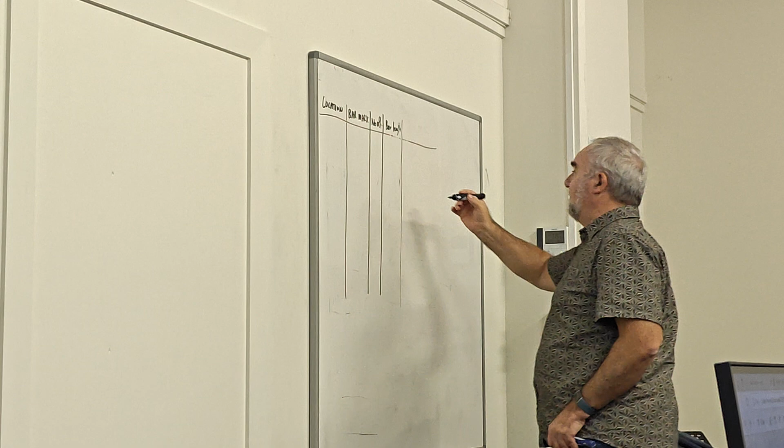Going to get it wrong. Bar length, hopefully you'll prove me wrong. Bar length. And then after that we have the mass per metre and the weight overall. So mass per metre, the weight. And over on the far side here we're going to do a sketch.

So let's have a look at what we've got, and I'll just summarise it. So it's kind of a T-shaped retaining wall. The ground is over here. So when the ground is over here, this is the bit that's open to the air. So when we talk about each face and far face, we're looking from this side. We're looking from the side that's not being retained. So therefore that would be near face and that would be far face. But because we've got them on both, we call it each face.

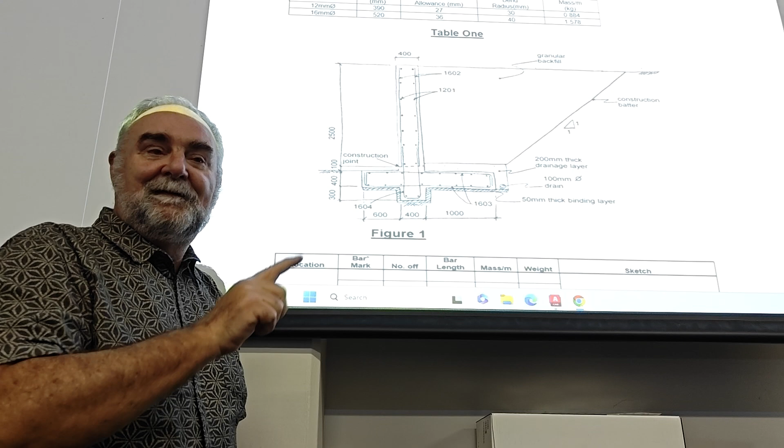Now there's abbreviations for those and they're not too hard to remember. Near face is NF, far face is FF, and each face is EF. Yes, that's not worth half a mark by the way, but it was very, very quick of you. So you're going to have to put that abbreviation into there, and I'll do that in a second.

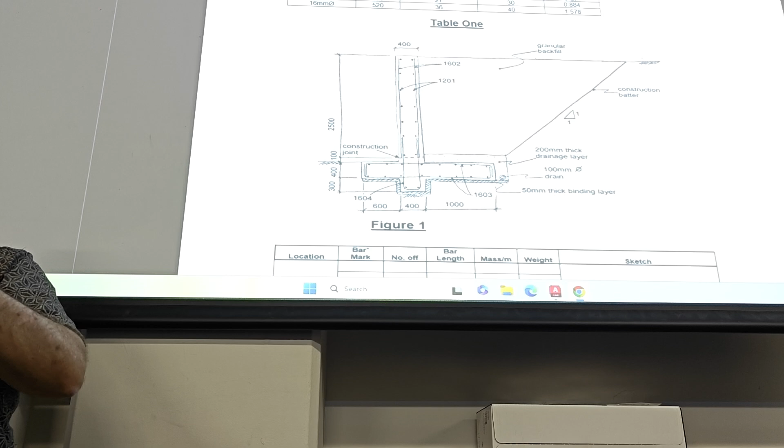The next thing to look at is that when I do a sketch, it is only a sketch. All right, do not copy it. Think about it. With reinforcing, it's exactly the same with bolts, and it's exactly the same when your grandmother used to do the quilting of the thing that's on top of your bed. Where did she stitch it? Did she stitch it in the middle or right around the very edge?

Come on, own up. Who's done quilting before? No? There's no real men in here, is there? No. No All Black potentials?

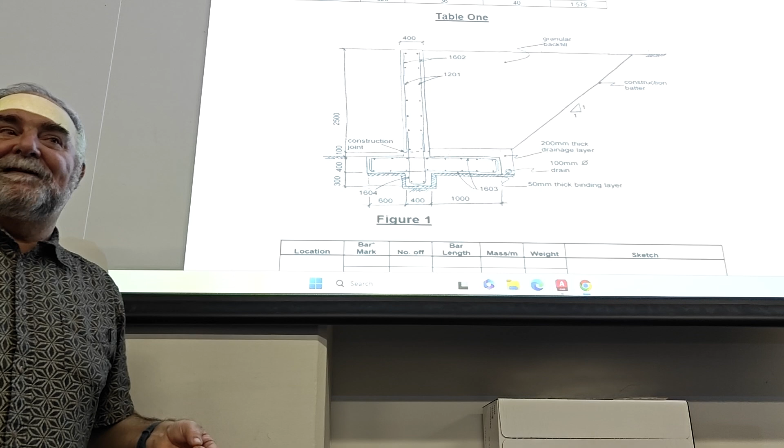No? Okay. So quilting is a thing where you make kind of like a duvet, and to make it the proper strength, you do the stitches around the outside. With reinforcing, we push the bars right hard against the cover. Now this morning we talked about the cover and the reason for it. For example, yeah. Beg your pardon? To avoid them from the rust. Yeah. So we've got to push the reinforcing to the edge, not over the cover. So it's against the cover.

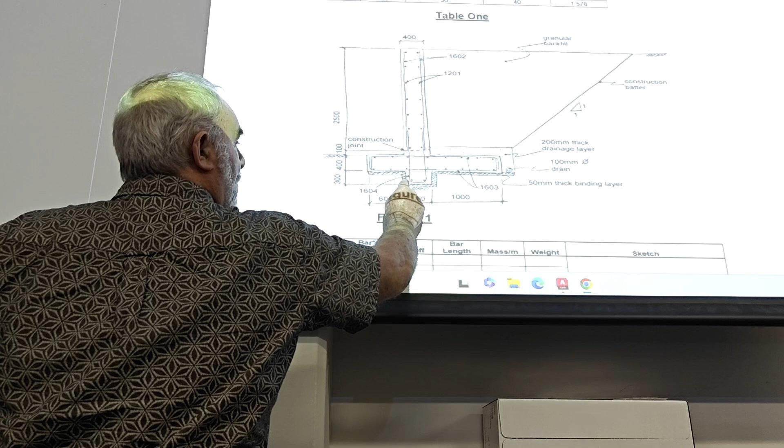If my hand was the cover, it would be right there. Okay. And that's how we work out how. So for example, this piece here, the sketch shows me it's inside here. So this is all 400 all the way up, but there's no reason why that bar can't go in behind the other bar, which means if we push it against the cover up the top there, 50 mils. So that will be 400 minus 50 minus 50, and that's what it would sit hard against. So we already know the width of that bar is 300.

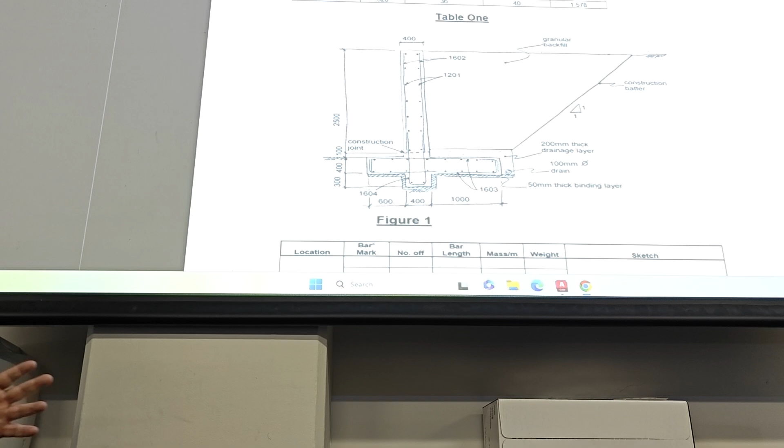The only time when you can't push it against the cover is if there's another bar in that direction stopping it from going any closer to the cover. So there are times you have to think about it. Same with these. Even although I show that in a sketch as being overlapping, in actual fact both bars are in behind each other. They're exactly the same. One's upside down and the cover is 50 mil, so that would be 2000 minus 50 minus 50, and that would give me the overall length of that bar. So it is fairly basic, the maths, it's not too bad. But you're starting to get the hang of what I'm talking about in terms of pushing it to the outer extreme.

This one is an old exam question when you had to sit an exam in this subject back in 2010. So it's got a few other things here, like they call that blinding concrete, which is kind of like a builder's mix that gets thrown down there before you start the job. It's got some drainage, which you have all got, or filter material, and a drain, and granular backfill, not blackfill.

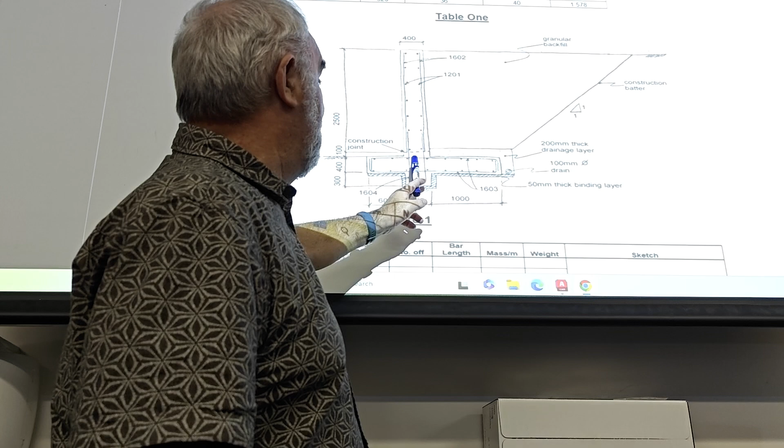See the wee donuts? No, you've got to work it out, and you'll actually find that that's not right, because this is a sketch, I've only sketched it.

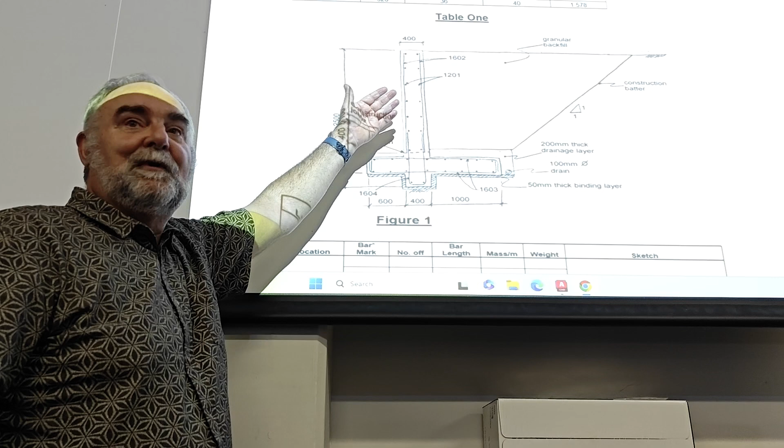We need to work it out as engineers properly. This is very typical of what I used to get, that I'm not a registered engineer. A registered engineer would come into the office, sort that out - that's his design or her design, and you would have to turn it into working drawings and do the bar schedule.

So it's not unheard of, that sort of thing. How do you figure out the faces? This here is all...

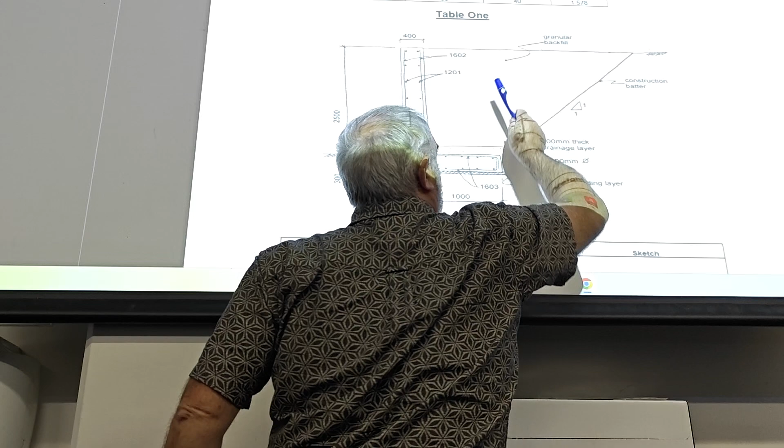Granular backfill, which is kind of like a very fine material made of rock. So this wall is holding that back. So you've got a property and you've put a retaining wall in and you're stopping anything coming any further.

So you're looking at the face that's got the earth. You don't have a retaining wall with dirt on both sides - always one side's being retained. So if this was a retaining wall and I'm looking at it, then this would be near face and and the other one would be far face. Okay, right?

You don't have to worry about that on our assignment because we're looking down on a slab. But you will in the test, so do remember it for the test.

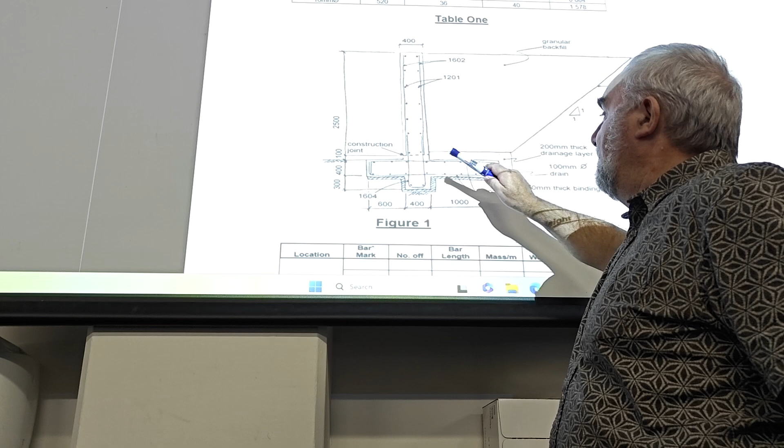Okay, so the first bar we're going to look at is 1201. 1201 is the donuts, they're all over the place, all the way down here, all the way down here. So when you get a complicated drawing slab like this, we divide it up. And there is a reason for dividing it up because we've also got something different called a construction joint.

Now, there is - you would have heard perhaps before of an expansion joint. And the chap at the back in the lecture this morning mentioned about concrete expanding and contracting. We often have expansion joints just for that reason.

I'll give you an example, a bridge. You know, when you come up to a bridge on the road and your car goes thump, and you go off the other end thump, and you carry on. That's an expansion joint, and they fill that up with a bituminous type mix that takes up the expansion.

All right, so you'll get that thump thump as you go off a bridge, and that's why often in major earthquakes all around the world that go up and down, often you'll see a bridge has dropped and the road level's up here and the bridge is down here, because the concrete was always separated from the other concrete leading on to the bridge.

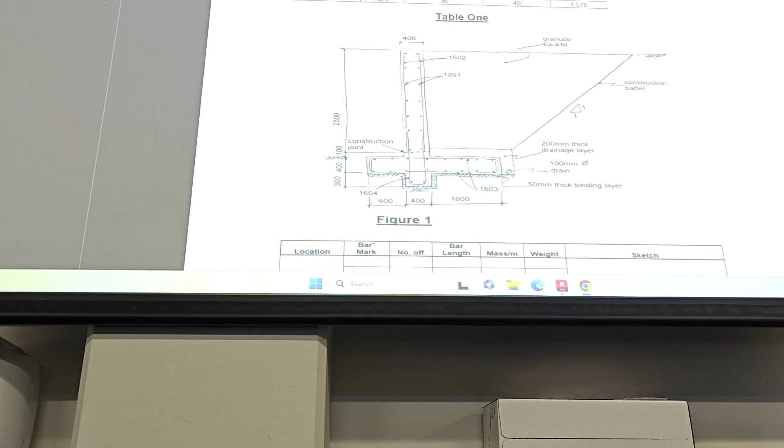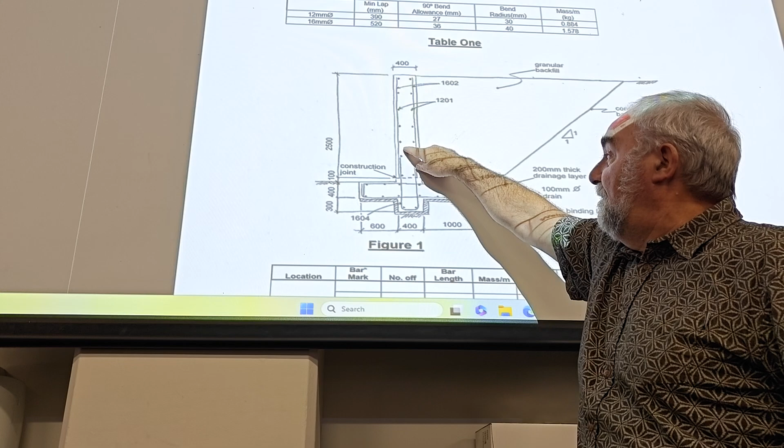That's not an expansion joint, that's a construction joint. That means that they will pour this concrete here and they'll leave this reinforcing sticking up, and then when it's settled, the concrete's set, they'll come back, they'll put the shutters up there and they'll pour the next bit of concrete, and before they do that, they'll join the reinforcing with the lap and tie that together and away they go for the next lot.

You might have noticed on building sites sometimes you see these sticking up. Well, they used to just leave it like that, but now they put little cups on the top.

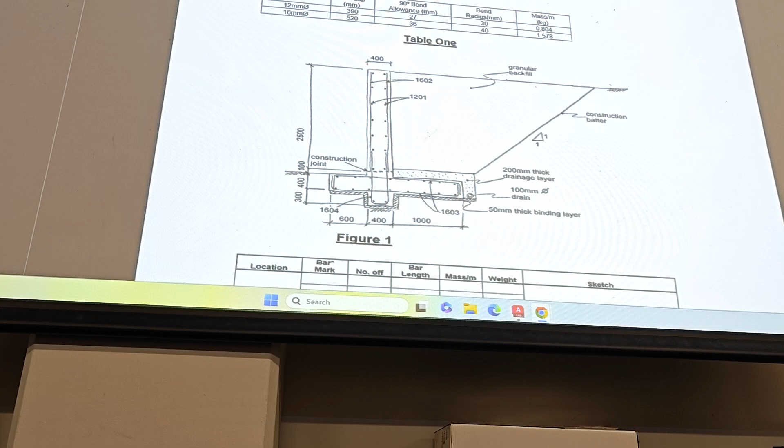And the reason for that is exactly the guy that I was talking about this morning that's built about this wide. He used to tell us stories of men falling off buildings and landing on those and ending up like a skewer when you're eating chicken, and the cups apparently stop that from happening. I don't know if they do, but you can easily fall on them anyway, just trip on them.

So it's the last thing you want, so they protect those with little cups. So you've learnt something today about health and safety - how about that?

So we're going to calculate all of those bar lengths, all of their dimensions, and all of their weights. So let's start with 1201.

So we're going to have this bit, and the bottom bit. So in a nutshell, we're pretty much going to do this 1201 here. We're pretty much going to calculate this bit, we'll call that A. This bit, we'll call that B. And this bit down the bottom, we'll call that C.

So let's start looking at A. To work out how many bars there are in A of those donuts, we have a distance of 2,500 from here to here.

We can't lie the bar on the construction joint because it's running that way and the whole bar won't get concrete around it. So we have to lift it up, the cover. We have to lift the cover up down at the top. So we end up getting...

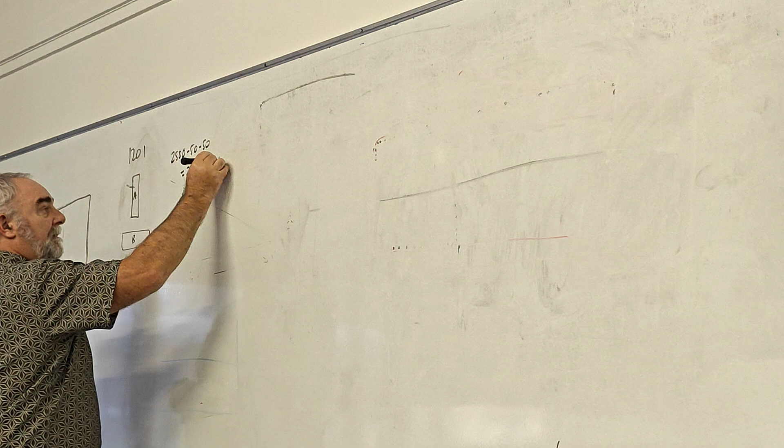And what do we get for an answer there? Sorry, that's not worth 8 marks, I mean half a mark. 8, someone a bit cleverer than me at maths. How about that? Okay, so that's 8 bars, right? You happy with that, Mr. Mathematician? 8 bars, right? Yeah. Wrong. Just 2,400 divided there? It's 8 gaps.

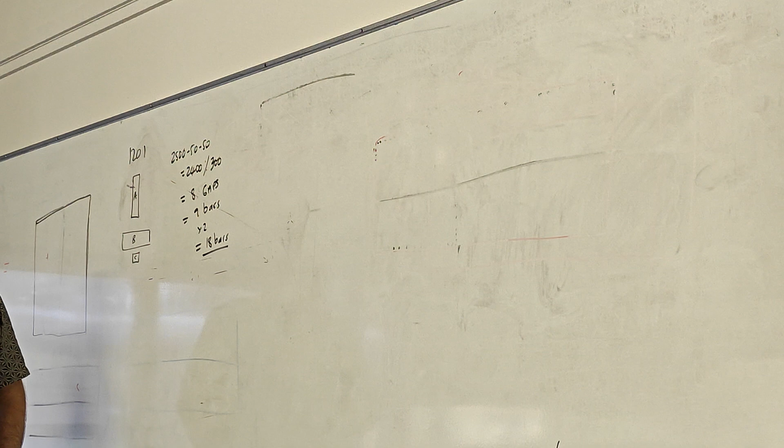No, I said everyone would get it wrong. Which means how many bars? 9 bars, right? Wrong. There's bars on the other side too. 9 times 2 equals 18, right? How about that? You all happy now? You should be, because that's right, okay? So let's put 18 bars there. 18 bars. So take A away, and we'll call that 18.

Let's go to B. So when we do B, it's a bit different. When you go vertically, it's easy - you take away cover, take away cover. When you do B, it's complicated, and this is where it's going to get complicated in your assignment. I'll do a big blow up of this. So the bars go like this, and they go like this. Alright? And the donut starts there.

But what's that distance? Well, the distance is going to be equal to 2 times the diameter, 1 times the diameter, and the cover, CVR. And it'll be exactly the same at the other end to find the centre line of those bars. So we do it centre to centre, horizontally.

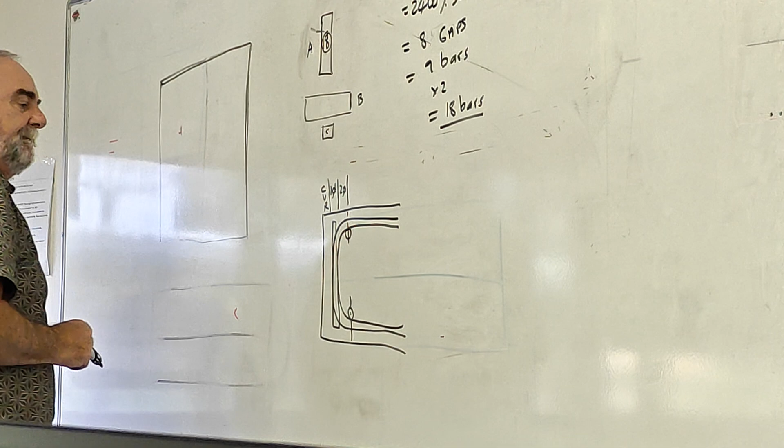So let's put that into maths. What's 2 times the diameter? Hold on, is it diameter of that bar or that bar? It's actually the one that wraps around it, right? So that's 16 mil, so that'll be 32. 1 times 16 is 16 and the cover is 50. So that distance is going to be equal to... that will be 32.

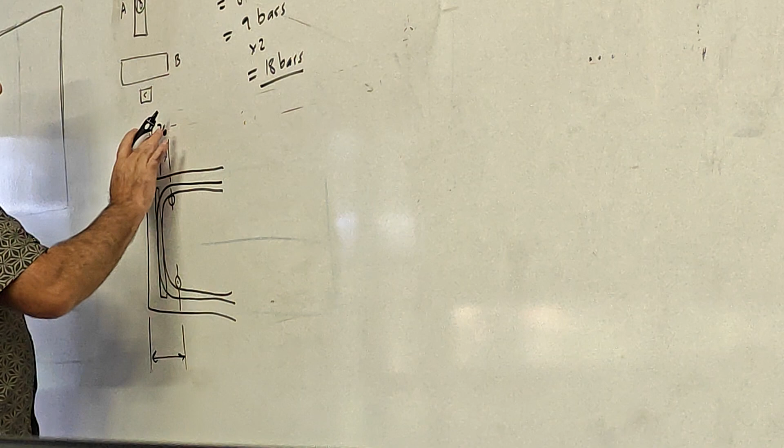Oh, well done. No, not half mark. I get that at 90 something. What's that, 90... 98 or 88? 88. 50 plus... big pardon? 98, yeah. And the other end is also 98.

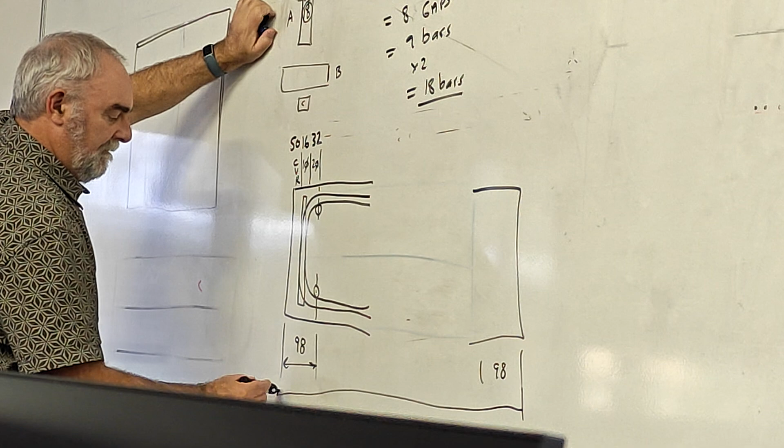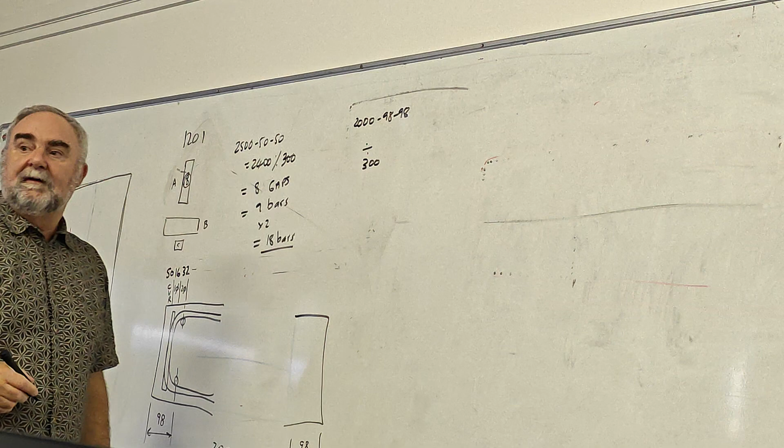And the overall length from here to here is 2 meters. See up there? So it's going to be, the equation for that is going to be 2 meters minus 98 minus 98, and then it needs to be divided by 300. So have we got someone that can do the maths on that? Here we are. We'll do that on... oh, you need your calculator this time, yeah? But you did the first one so quickly.

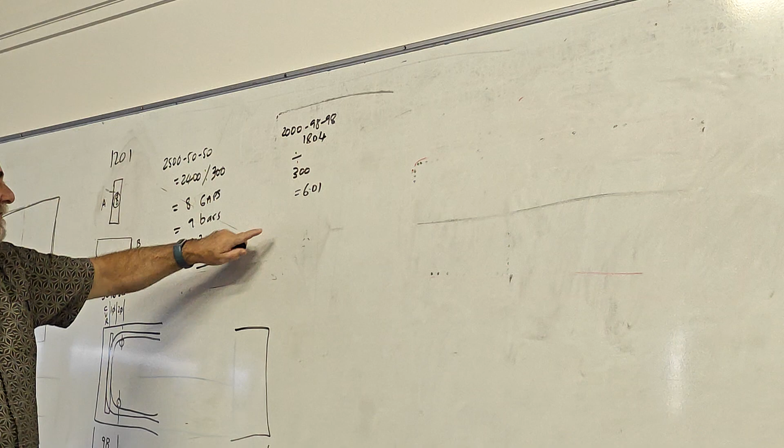And that means it's 7 bars times 2 equals 14. Right? Or is it right? I did say you were going to get it wrong.

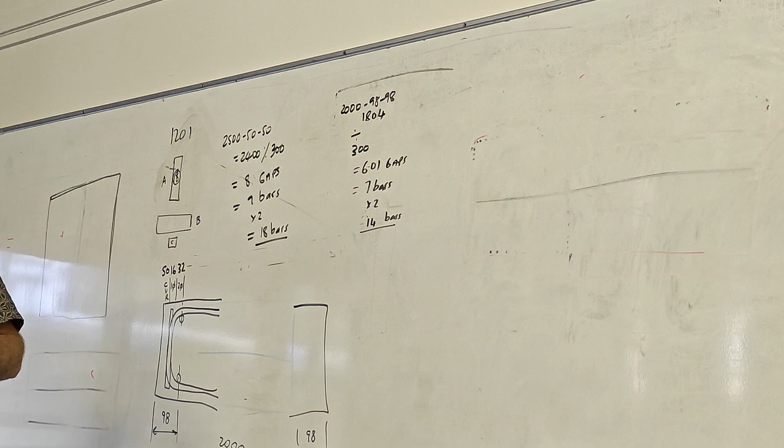Now remember, in New Zealand we over-design, like I said this morning in the lecture, because of Christchurch and every other thing that's happened with earthquakes. Does that go up to 7, or does it stay at 6? 7? You think 7? Go up to 7. Lots of 7s here, fishing for a half mark.

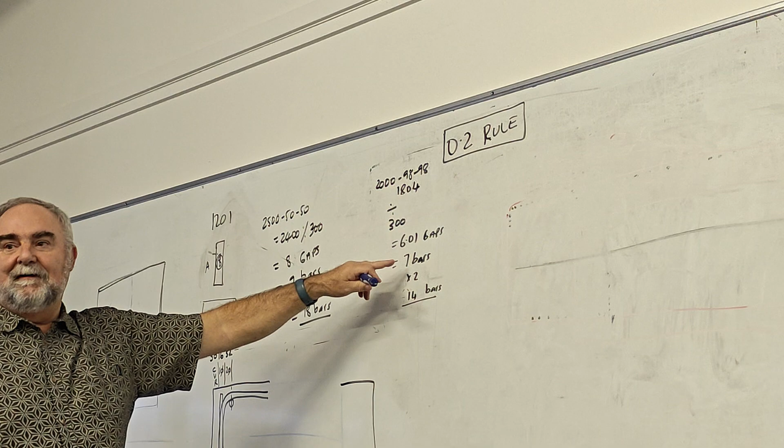Okay, I'll let you out of your misery. The rule is the 0.2 rule. Please don't forget that, because in the test I've got 0.199s and I've got 0.2s, and every student puts their hand up and goes, was it up or down for 0.2? The answer is 0.2, it goes up. So if that was 6.2, you guys would have all been right. If it was 6.1999, it would stay at 6. Right? Don't forget that. So in actual fact, that is correct. I'm just playing with you a bit.

All right, so that's 14. So this becomes 14. And you have a look at the bottom, because that is 300, and if you take away the cover, that makes 250, and it's 300 centres. You can only put 2 bars in there. So that's all it is, 2 bars.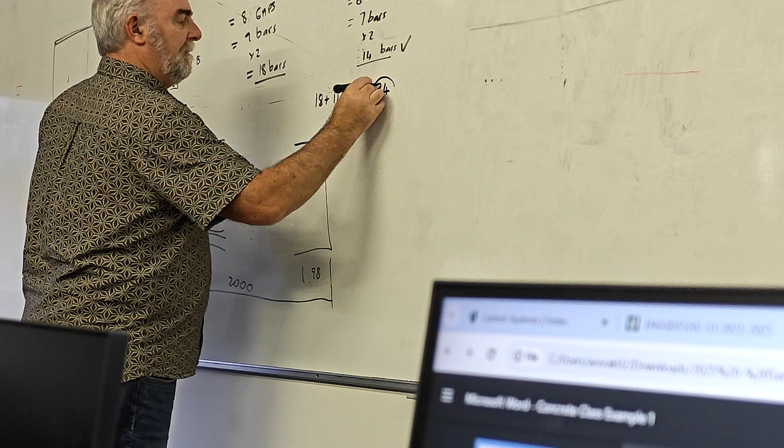So the number of bars is 18 plus 14 plus 2, which equals... 34, yeah. 34 bars. It's an alcoholic's dream, isn't it? 34.

Well, at this rate, we're still going to be here about midnight tonight. We've managed to fill in one number on the bar schedule. Yep.

Okay, there is a bar mark there that we can copy, so 1201. And I've already talked about the location being each face, but we've also got the top and the bottom, so that's easily covered. EF, E, F, and top and bottom. Alright? So you can have a combination of them all. You can also have each way, EW.

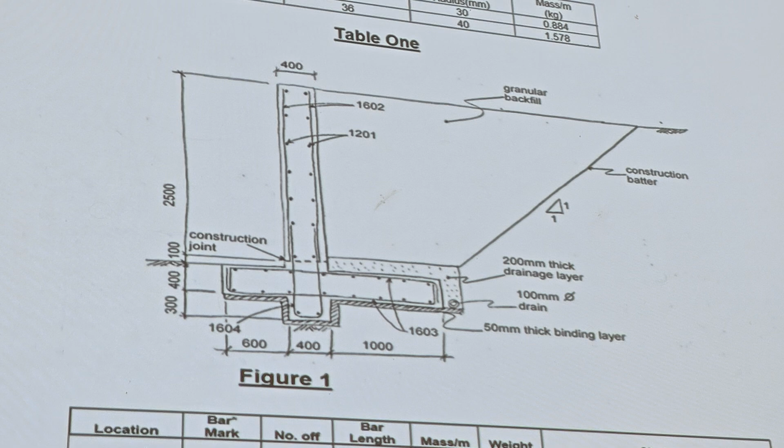But we haven't really got very far. We've managed to figure out one box. Anyone like to have a stab at how long that bar is? Going from here into the wall. I'll open it up to half a mark for a few seconds. You're allowed to answer it as well, but you won't get the mark. 5 meter. Very close. Unfortunately, it's 5 minus the cover at each end.

At 4.9. 4.9. Yeah. So I better actually write that up here so that anyone, you know, when you're copying the answer, yeah, length equals 5 meters minus 50 minus 50, which equals 4,900.

Now, here's another one for you. Another half. Gee, I'm throwing away all these marks. Bar length is 4.900. Why is it 4.900 and not 4,900?

Everything seems to be in millimeters. We're drawing in millimeters when it comes to your drawings. We're talking in millimeters. I've just been doing millimeter calculations. I get over here and I suddenly put 4.900. Half a mark.

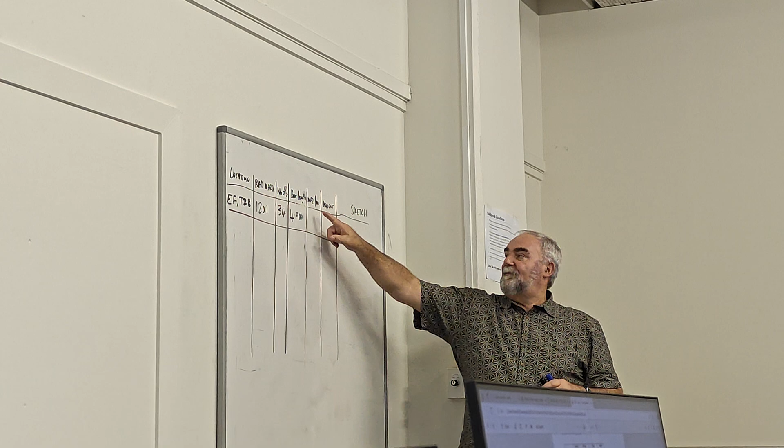This is a mechanics mark. By the way, and I would be very disappointed in you guys. Mass per meter, you can't work out the total weight in kilograms without putting things into meters. Doesn't work with millimeters, alright? A lot of my students don't do that, and they end up with 4,900. They multiply it by the mass, they get a weight of like 6 million, and they don't take the noughts off, and that's the kilograms that they come up with.

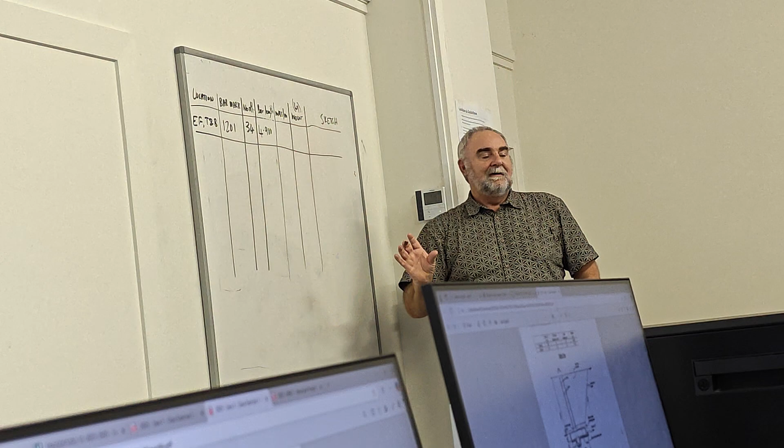So if you want to do it into kilograms, if you type right now into Google how much is steel, it'll tell you in kilograms the weight of steel. So we're talking about putting things into meters. So there is a mass per meter there that's on the chart up the top, and you'll see at this end for a 12 millimeter bar the mass is 0.884.

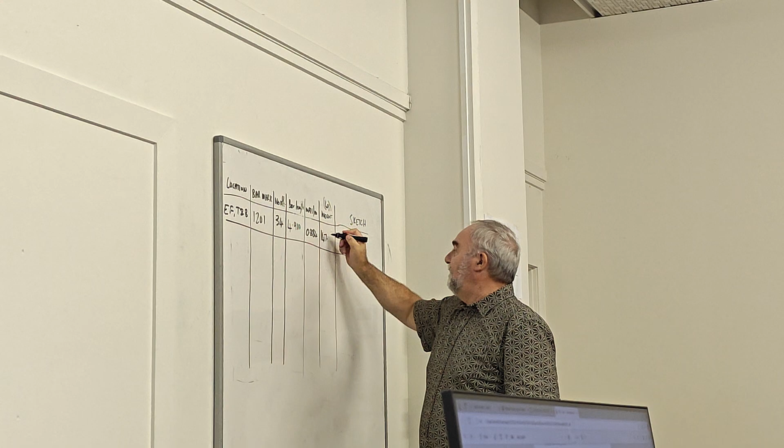And now the gentleman there that's doing the maths so wonderfully for me, 34 times 4.9 times 0.884. And just off the top of my head, I think it's 147.27, something like that. Is that right? Yeah. Thank you. It's all right, I've got the answer over there. I'm not that clever. You won't find me on the chase.

All right. Lastly, of course, we need to draw a picture. The cool thing about a straight bar is you just put the word straight. Have to be careful talking about straight bar though. Here we go. Let's put that across there.

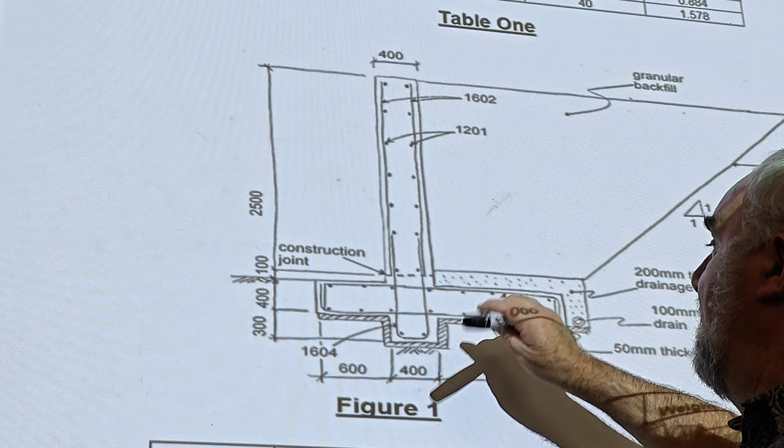Which one is 1602? Let's have a look. Oh, that's not too bad. It's straight. It goes from the top to the bottom, but I do notice that the sketch has got it right on the construction joint. Is that wrong? Well, technically it's not wrong, because you can have the point of the reinforcing bar there, just you can't lie it on it. Alright, there's enough concrete getting around the point there.

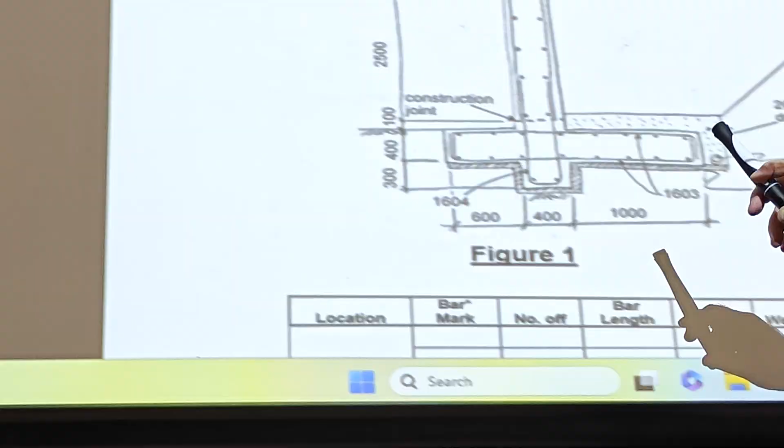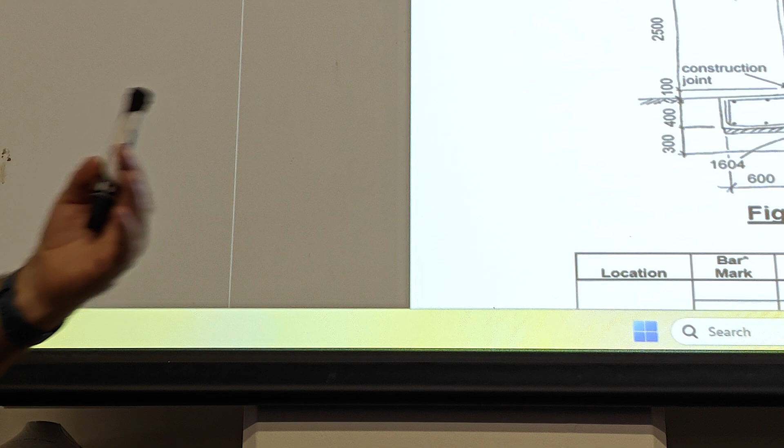That's easy enough. Now, how many of those bars are there? So you should be able to get this one because it's then going it should be 2490. No, it's the length of, he was close before when he said 5 meters. So these bars are going to go for the whole 5 meters minus the cover. So it'll be 5 meters minus 50 minus 50, which equals 4,900 divided by 300, 300.

Right? And we all know that equals 16.333, is that right?

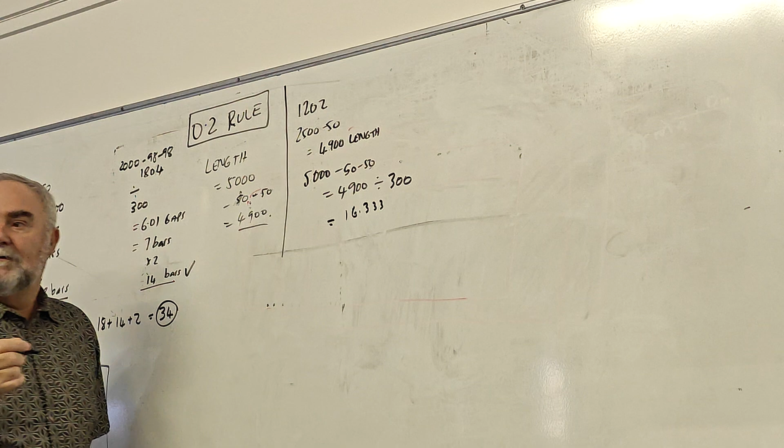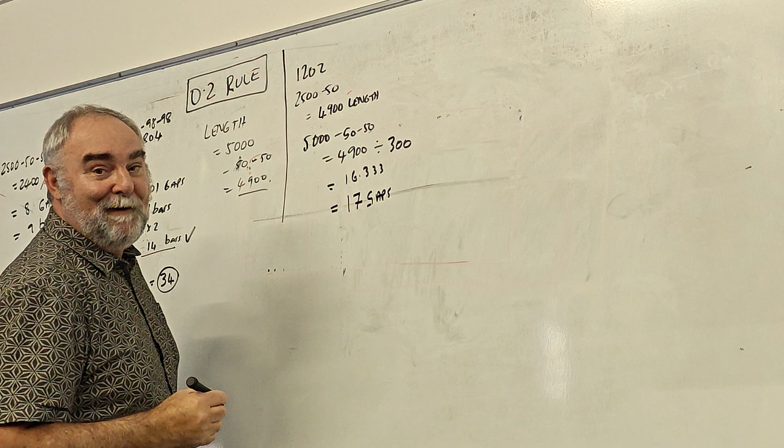This time I'm not using the model answer. Which equals how many gaps? 17. Yes, 17 gaps. If you can tell me why, you can have half a mark.

Because it's more than 0.2. Correct, he just applied the 0.2 rule. It's more than 0.2, and of course that goes to 18 bars. And guess what? We can put 18 bars and 4.9 over here on our thing.

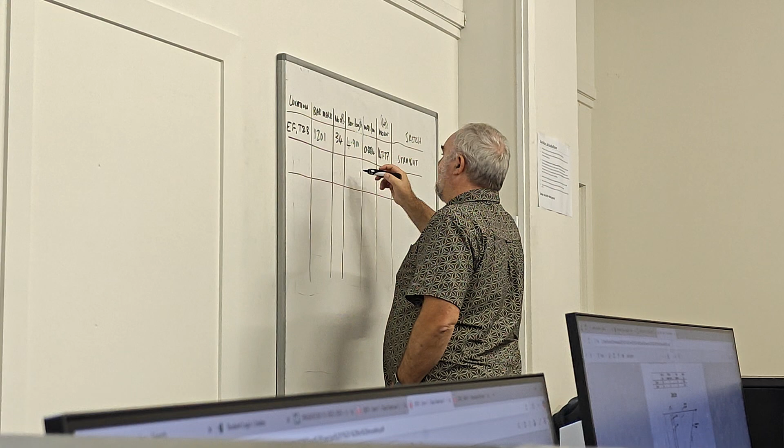What's going on here? 1602 is the bar, isn't it? Is that right? Yeah, 1602. And the bar length, it's not, it's actually less. Is it 2,500? Yeah here, that's 2,453.

Sorry, I got that wrong. It's 2,500 minus 50 equals 2,450. Sorry, my bad maths. What happened to my checker? Must have been asleep then.

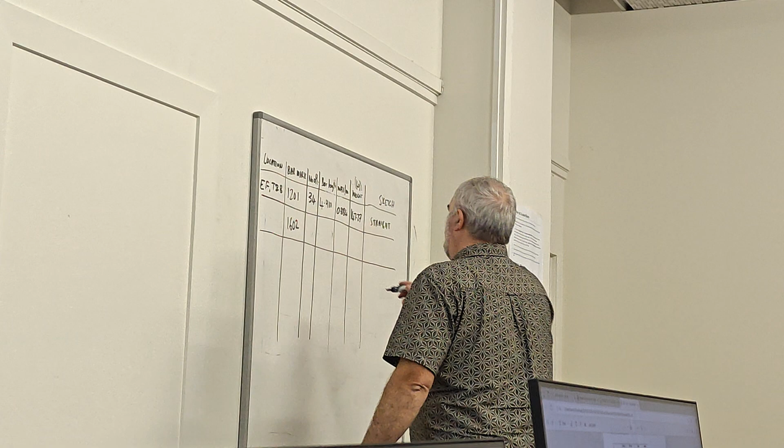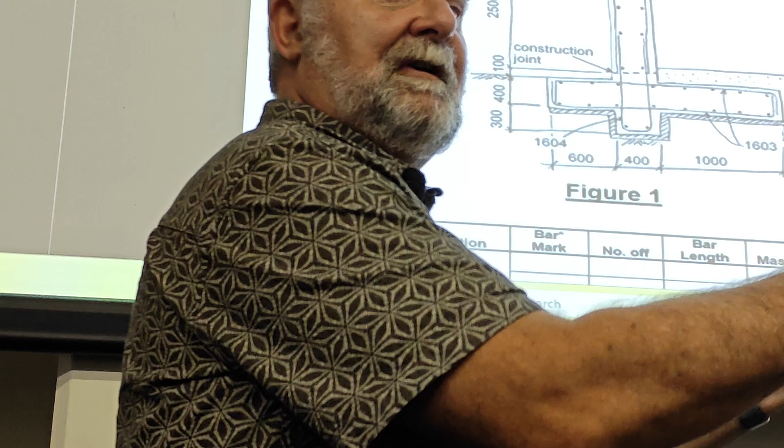2,450. And how many did we get down there? 18, didn't we? It was actually 36, because there's 18 there and 18 there. Times 2 equals 36. So there's quite a bit of thinking to do when you're doing these, it's easy to make a mistake, isn't it? I just made one then because I assumed it was one, but there's one each side. 36, 18 altogether on each side, 36.

And that is each face, because there's one at the front and one at the back. And if we go up to the top chart, you can see up the top it's 1.578, the weight of the 16mm bar. And if we multiply that by that by that, and try to beat the teacher, we get 139.18. And straight.

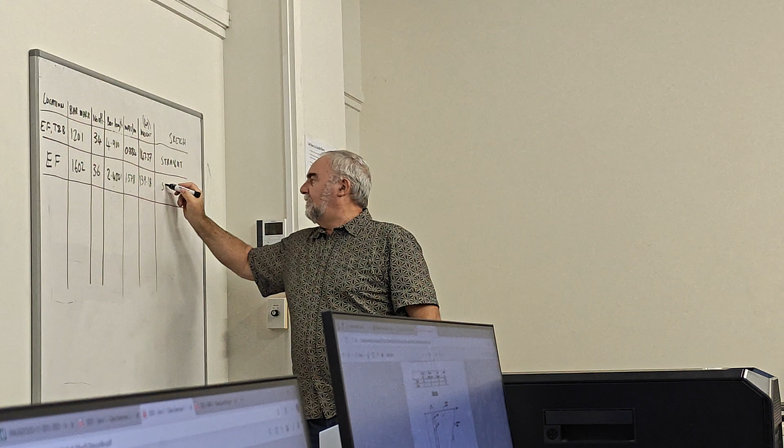Now it's time to draw pictures. The next bar is shaped like that. If we push it to the very edge, it's going to be 2 metres minus cover each side. So 1.900.

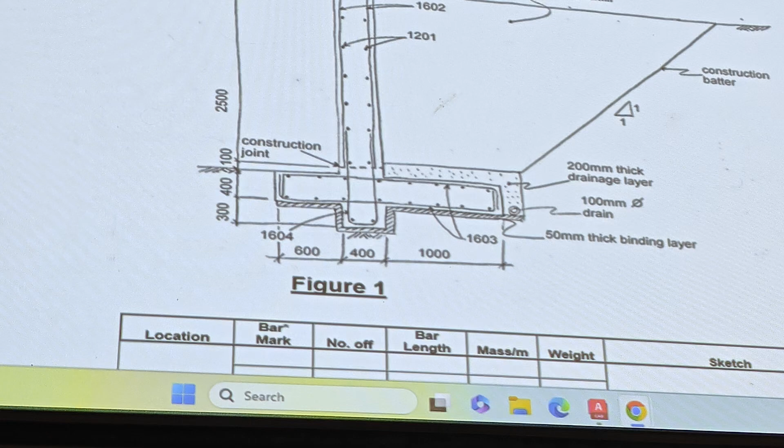And the width of that bottom anchoring slab is 400, so that'll be 300 when you take off the cover, so that'll be 0.300 and 0.300. Sometimes people do these in millimetres on the sketch. You don't have to draw the sketch to scale, just a stick line will do.

This next one is going to be bar number 1603. And this time it's going to be top and bottom, because we're on the bottom part of the retaining wall.

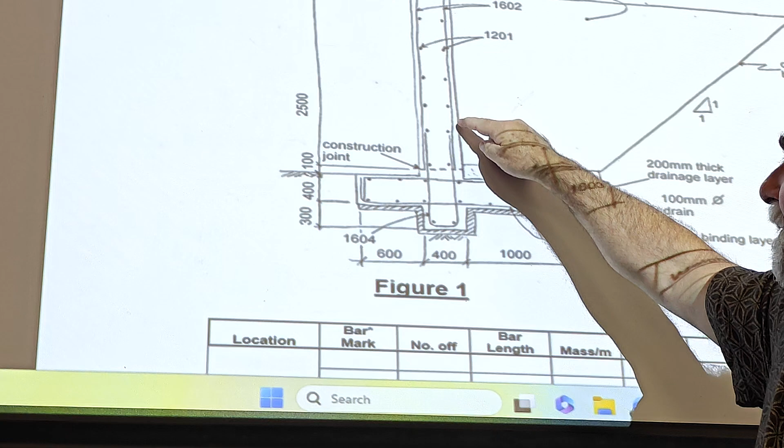And the good thing is we don't have to do that calculation again, because that bar there and this one tie on to that one. It's going to be 18 all the way, so there'll be 18 of those, another 18 of those, and another 18 of those. But this one here, there's 2 of them, that's only 1 of those. So the 2 times 18, you get 36 again.

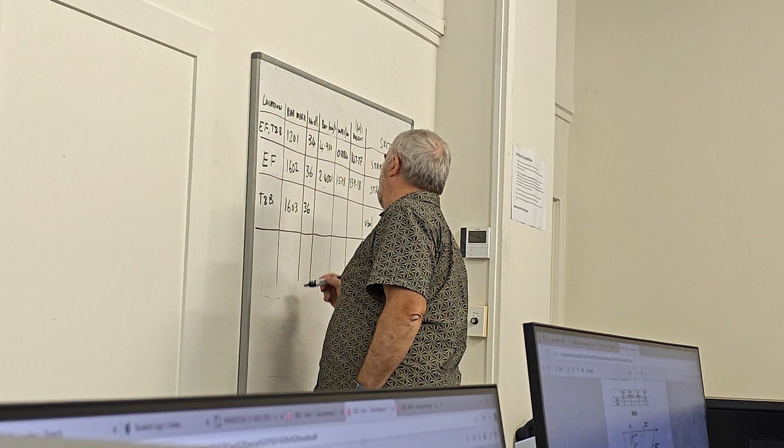We don't know the length yet. We do know it's 1.578. So we've got to calculate the length, and this is what I was talking about in the lecture. To calculate the length, we need to draw this little figure out.

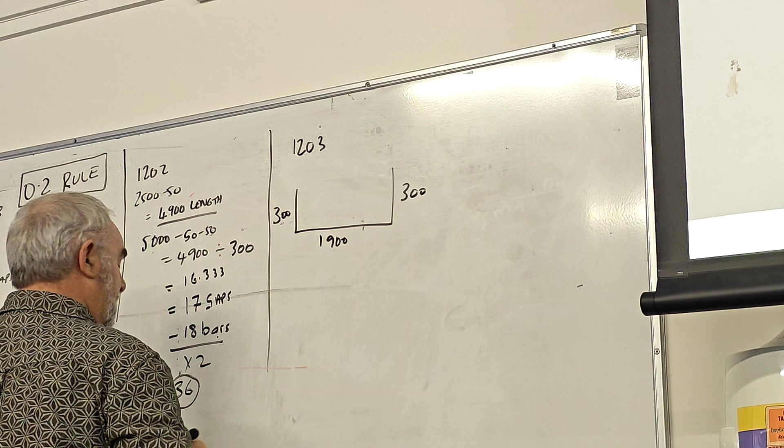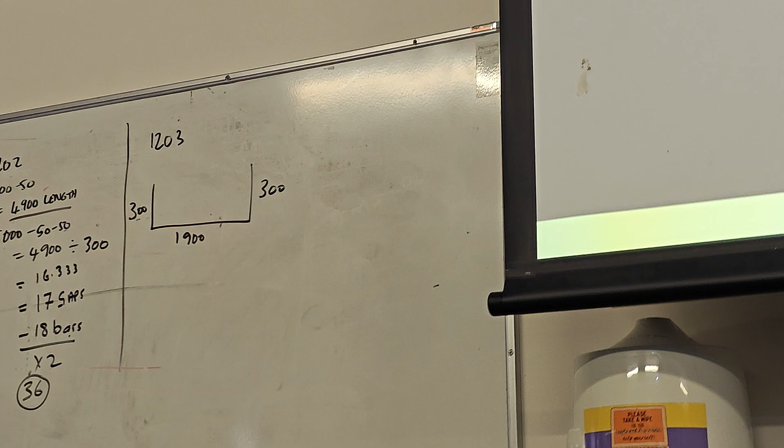This is 1203. So it's 300, 300, 1900. So I was talking about the steely guy that bends the steel. The whole idea is you can't bend steel at right angles, so there's going to be a curve. And when you curve something, you kind of cut the corner, so it makes it smaller in length overall. And the corner cut is given to you up the top there by the 90-degree bend allowance.

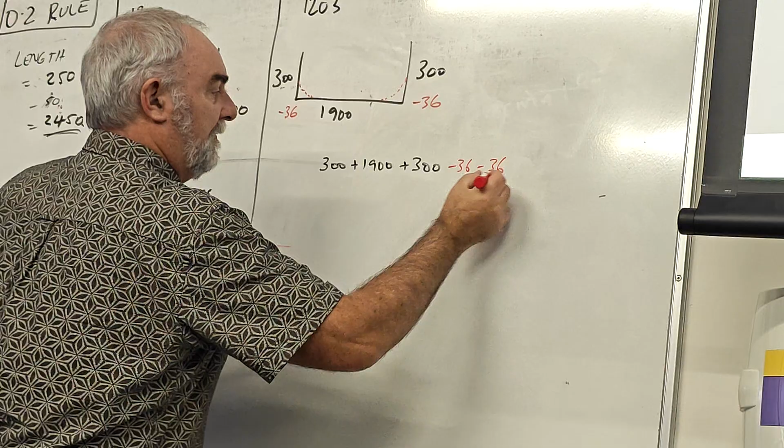See that? For a 16mm bar, it's 36. So in other words, because that's going around the corner and round the corner, it's minus 36 and minus 36. So what it ends up being overall, the overall length is 300 plus 1900 plus 300 minus 36 minus 36, which equals... I'm not going to have time to get back, he's going to beat me this time. 2428, 2428.

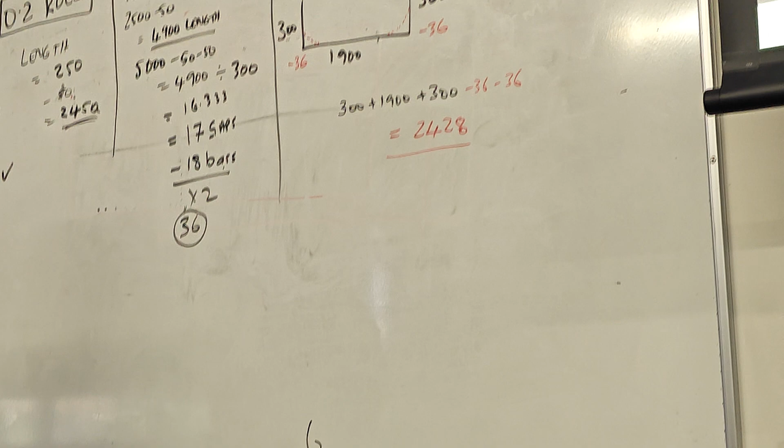2.428. Is that right? Is that what you said? 2428? Does everybody else get that, that's been staying awake? Yep, 2428. So I'll put my 2428 here. And now we're going to multiply that by that by that, and we're going to get an answer of 137.93.

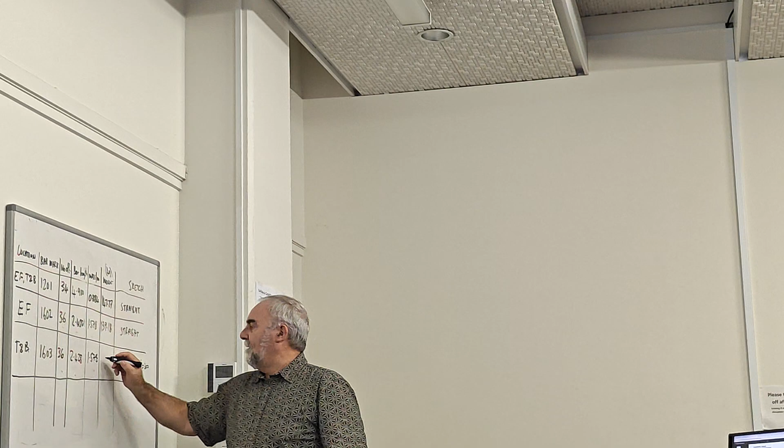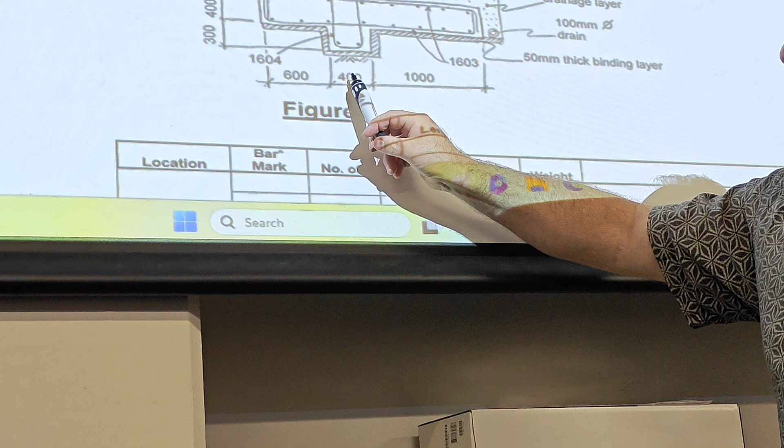Lastly is the U-bar. The U-bar is going to be 300, we already talked about this bar. It's going to be pushed against the edge, so it'll be 300 because it's 400 minus 50 minus 50. Better put that over here.

1204. It's going to be 400 minus 50 minus 50, so it's going to be 300. It's the height that's the problem. So to work the height out, I do it this way. The height of this is 300, the next is 400, the next is 100, and the lap is given to you up the top.

Now which one do we take? Where's the lady from this morning? She can tell me. Which lap do we take, the 390 or the 520? Perfect. That's half a mark for doing that. There we are, I'm being generous.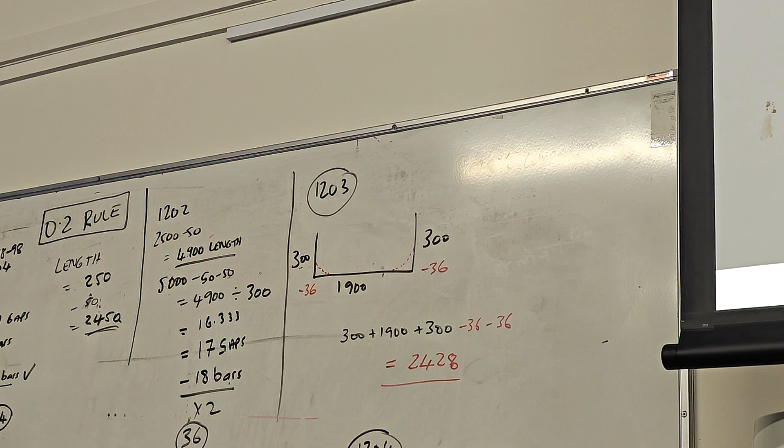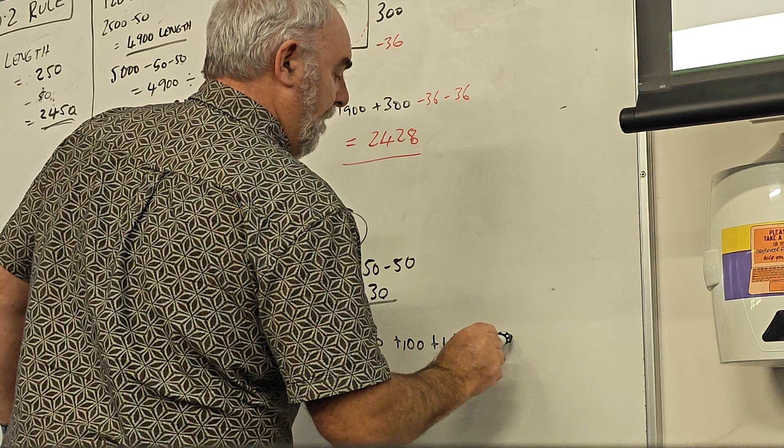So let's do that. That's 300 plus 400 plus 100 plus a lap, so it'll be 300 plus 400 plus 100, but we have to also minus at the bottom for this cover. So the lap, as the lady there said, is 520, correct, 520 plus 100 plus 400 minus 50.

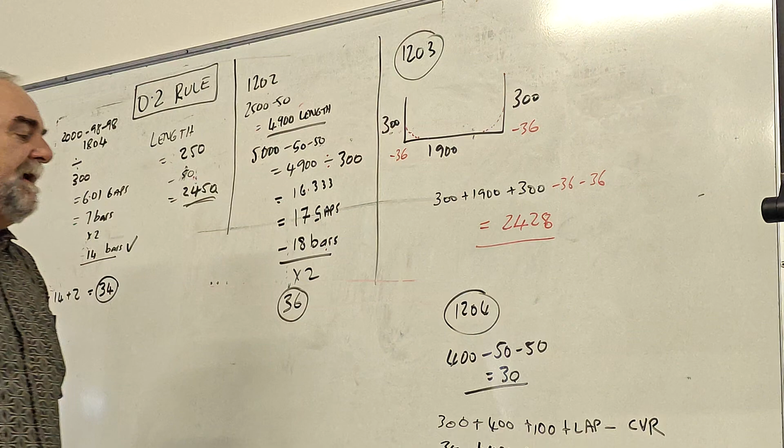There we are: 300 plus 400 plus 100 plus 520 minus 50. 1270. How much? 1270. Thank you, so that's the height, 1270.

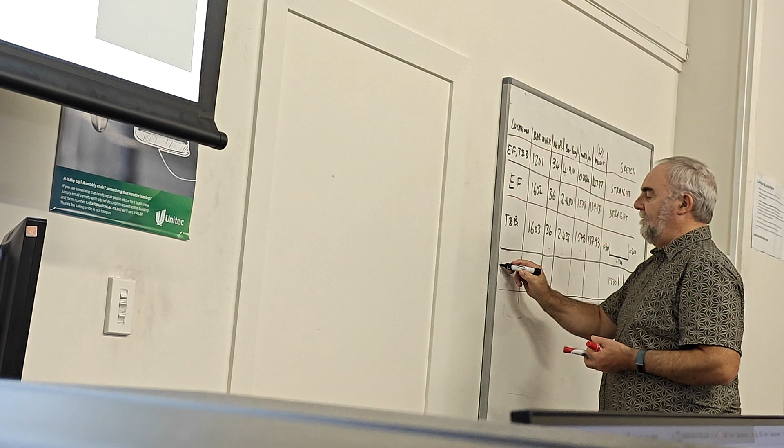And 0.300. 1604. This one will be top and bottom and each face. There are 18 of them because we've done that calculation before.

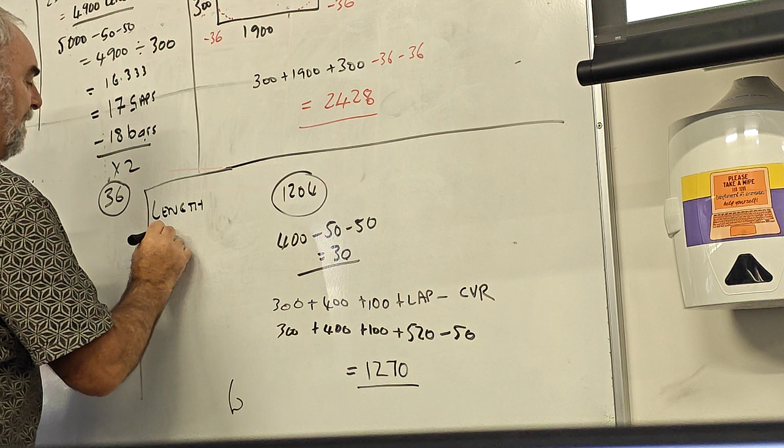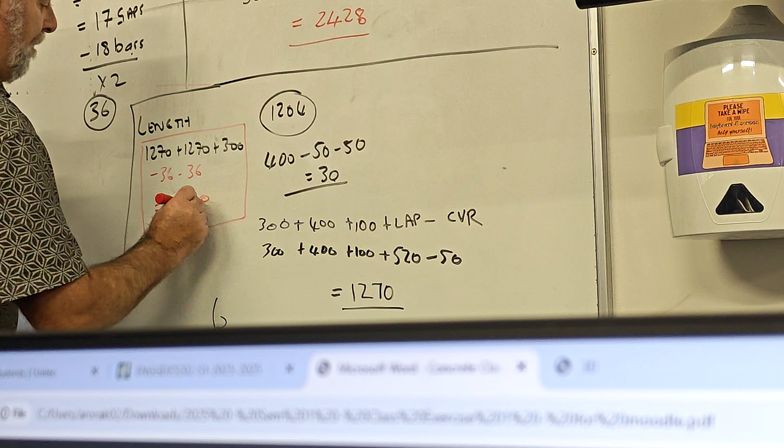And the bar length is going to be equal to 1270 plus 1270, so the bar length for this one is 1270 plus 1270 plus 300, and then of course minus 36 minus 36, and we get an overall length of 2768.

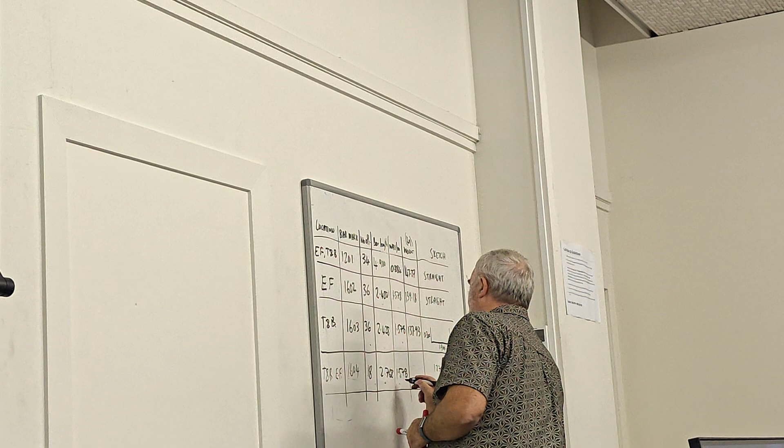2.768, it's 1.578 is the weight. We multiply that by that by that. The answer is 78.62.

One thing missing, the total. Please, when you do your assignment, don't forget to add them all up, because the whole idea of this is to get a total so we can get a price. Just doing that is not enough on a schedule. So when I allocate marks, even if you haven't got all this right, your total might be close to mine, and I may decide to give you half a mark for your total. So it's worthwhile doing that, or it could be just a thing that bumps you from adequate to good, which is 75% compared with 50.

The total here is 503.00. And probably put a kilogram there anyway, just to remind the client.

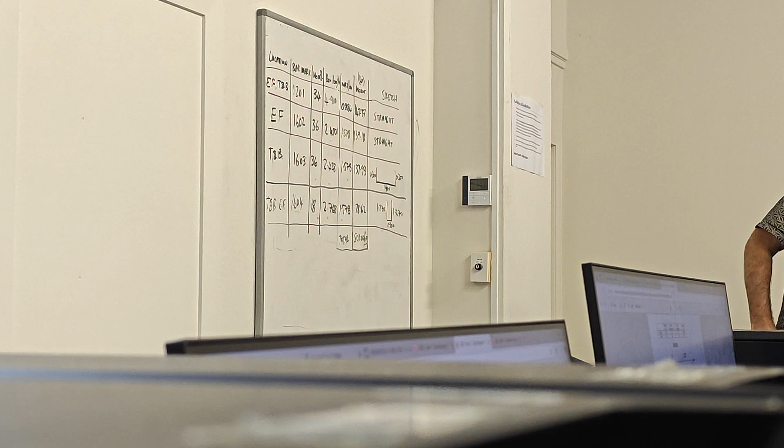Alright, it's the longest I've been on my feet for a few days, doing all your marking. There's the calcs down the end. The good news about what I'm about to show you and make available on the internet is I have got something that might also help you.

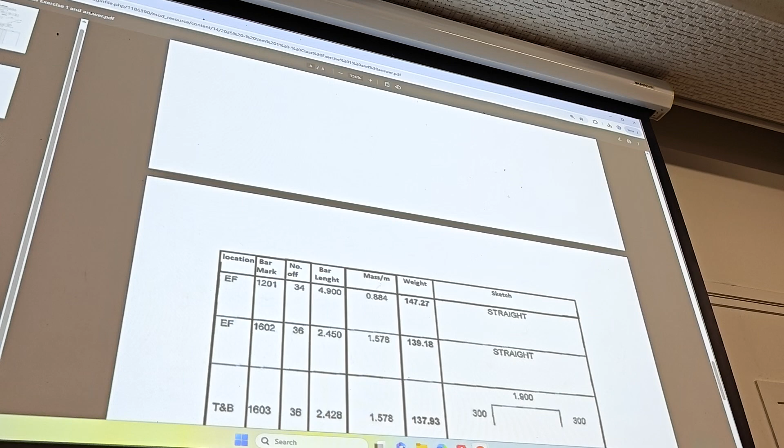Not that one. But this one here I'll make available, the answer.

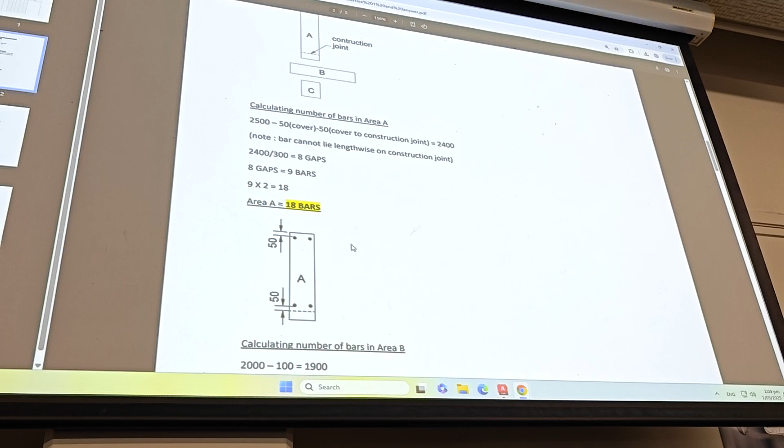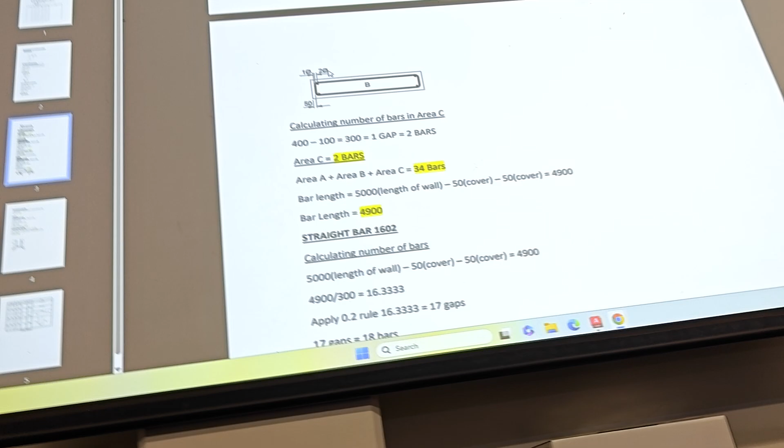Okay, so we started off by dividing that into 3 areas. We then worked out A, the first one, by taking the distance from here to here, and we got a calculation to give us 18 bars. We applied the rule, but the rule didn't really apply, it just still became 8. And I told you about the 2 diameter, 1 diameter, and the 50 for the cover, and the bend allowance.

And we applied that to 1603 and 1604, and there's the last one that we did, and we ended up getting those answers there, which should reflect what's on the board.